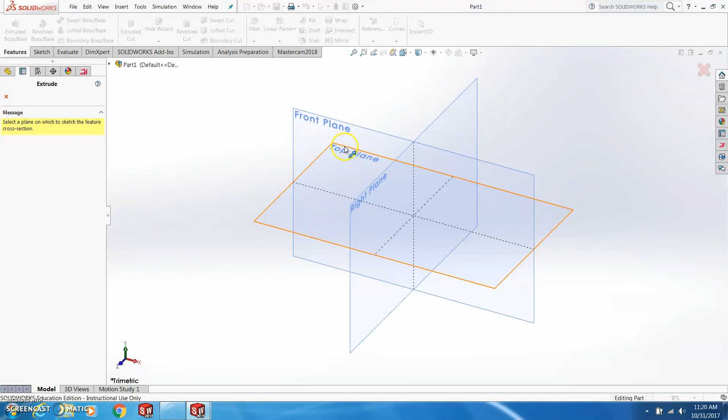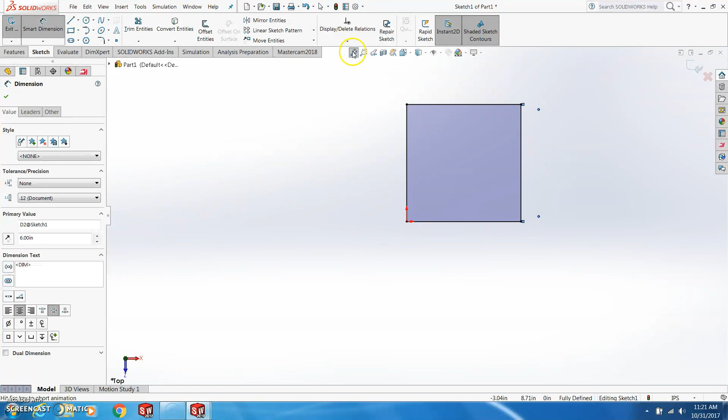First thing we need to do is draw a rectangle. Go to Smart Dimensions, and we're going to dimension this 6 by 6. Next, we're going to fit it to the screen. And we need to draw a couple of center lines, one vertical, one horizontal.

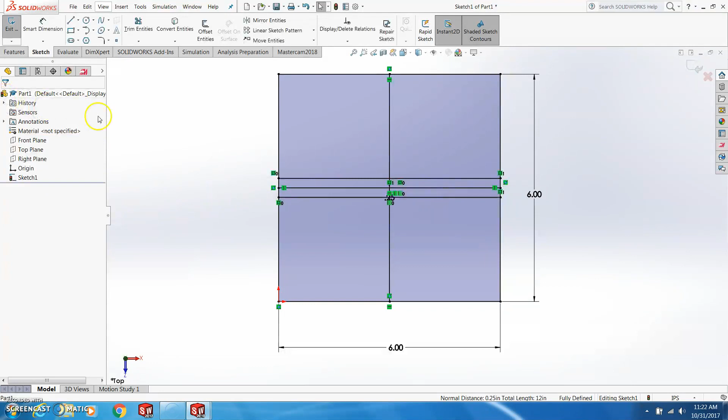Next, we're going to offset those center lines. So we go to Offset Entity, and we're going to offset them 1/4 inch on each side. Then we're going to mirror that line. We're going to go back and try it again, I forgot to finalize it. Offset, mirror, line. Okay, and then we'll do the same thing for the vertical, and then we'll mirror.

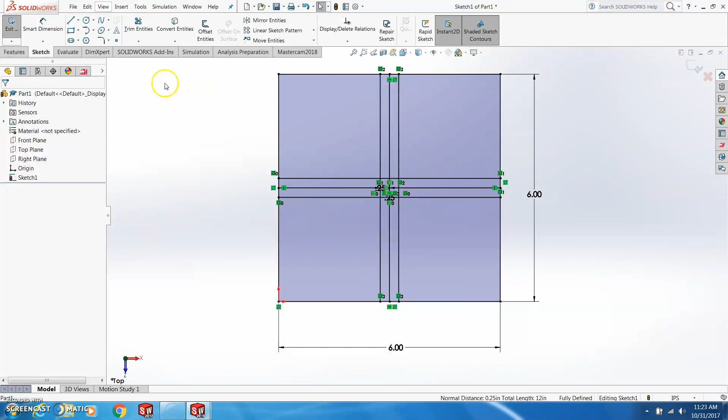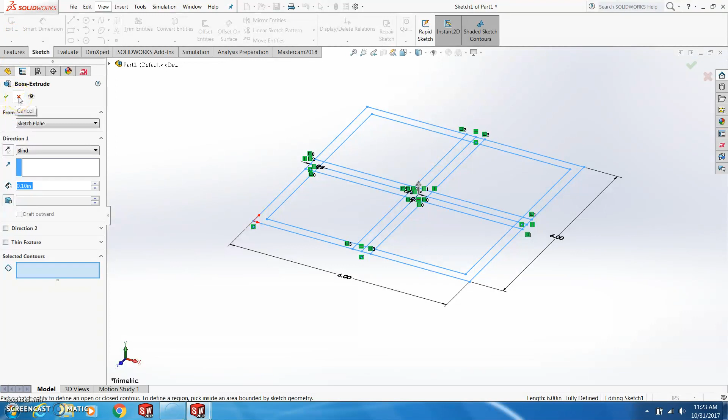Now, we're going to mirror, offset around the perimeter of the piece. So we'll go back to Offset, choose the perimeter line. Now we want it to be on the inside of the dish, so we'll hit Reverse. We are ready to exit our sketch at this point. It's asking us to extrude, but we're doing a 2-dimensional drawing here, so we can hit just the check mark. Now we're ready to put our first tool path on.

We want to go to Mastercam, and we're going to be putting a 2D tool path on. The first tool path we're going to put on is a contour to go around the outside edge to make sure it's 6 inches all the way around, giving you a nice smooth edge. So we're going to go around the perimeter lines. Hit the check mark. Again, we're going to click on Contour, check our tool. Got nothing listed here, so we'll go to the library and look for a 1/4 inch flat mill.

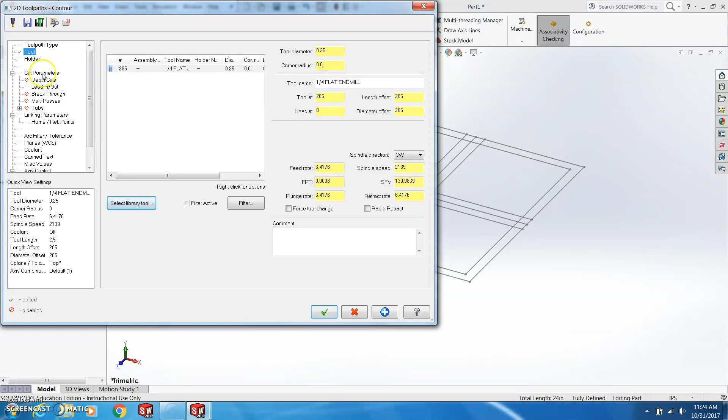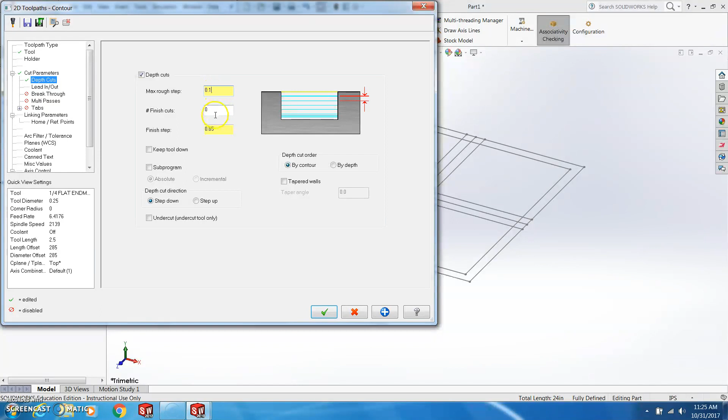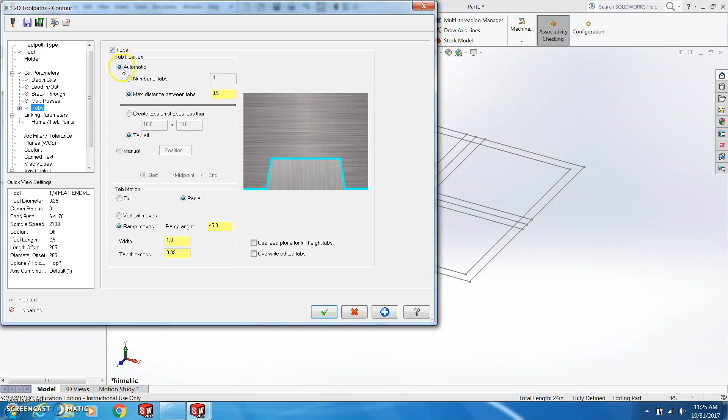Under Cut Parameters, we will change our compensation direction to the right, so it'll be going around the outside edge. Move to Cut Depth and change that to 0.125, or 1/8 of an inch, half the diameter of the cutter. We're going to uncheck Lead In and Lead Out. Breakthrough we'll leave, multi-passes we'll leave. Tabs, we're going to be cutting it out of a larger piece of stock, so we'll just leave those on automatic.

And linking parameters, we'll change our retract to absolute and 2 inches. Feed plane we can leave. Top of stock we will put at 0.75, and depth of cut we'll leave at 3/8 or 0.375, and hit our check mark.

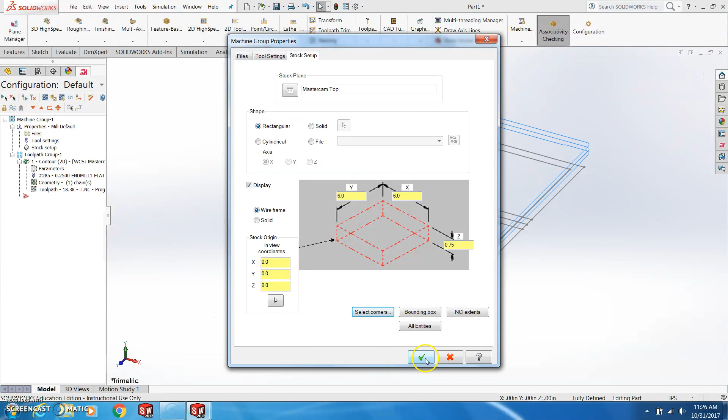Next, we'll want to go to properties and stock setup and hit our bounding box, hit the green check. We'll change the Z to 0.75 and move our 0 over to the lower left-hand corner, and we'll hit select corners and choose that lower left-hand corner and hit our check mark. We can hit the green check mark down below, and we're ready to move to our simulator.

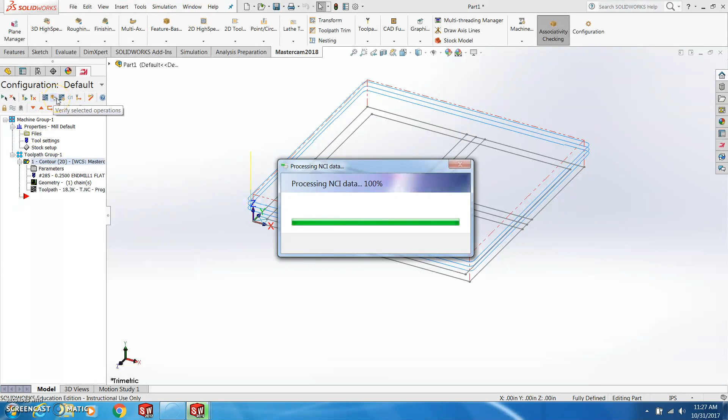First, we'll go to backplot, make sure that our tool and our holder are selected, and now we'll move to the simulator. Everything looks good there, we're going to slow it down a bit. And let her go.

Like I said before, we're not touching the sides here because we are cutting this out of it. We'll be using an 8x8 block to cut this out, but we just want to make sure that our edges are square. And it seems to be doing that all the way through.

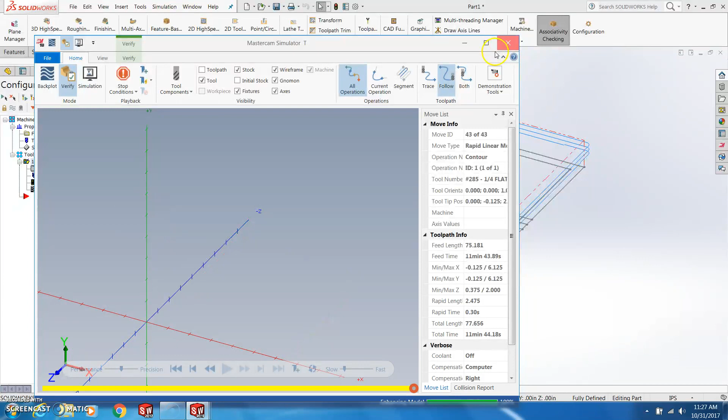Doesn't look like it went all the way through, so I'm going to go back to linking parameters and check that. On this contour, we want it to cut all the way through the piece. I think I left it at 3/8, and it needs to be 0.75. We're going to leave that at absolute. So now we've got a dirty operation, we've got to regenerate. And we'll go back to the simulator and try it again.

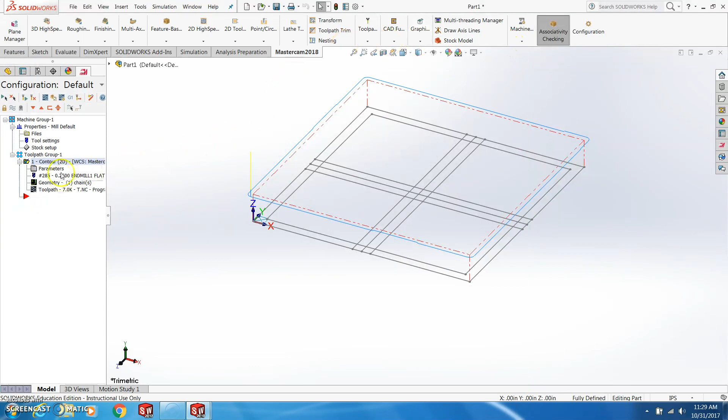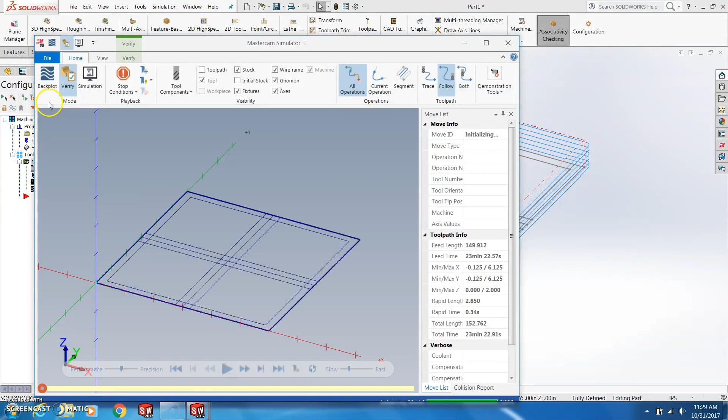I'm going to let that run one more time. It looked like it was going pretty sluggish. That's better. I want to check that linking parameters setting again. It doesn't look like it was going all the way through. Let's set that to 0 this time. Regenerate. That's much better. So under depth on the linking parameters is going to be 0, and top of stock is going to be 0.75.

We'll do the next cut on the next video.